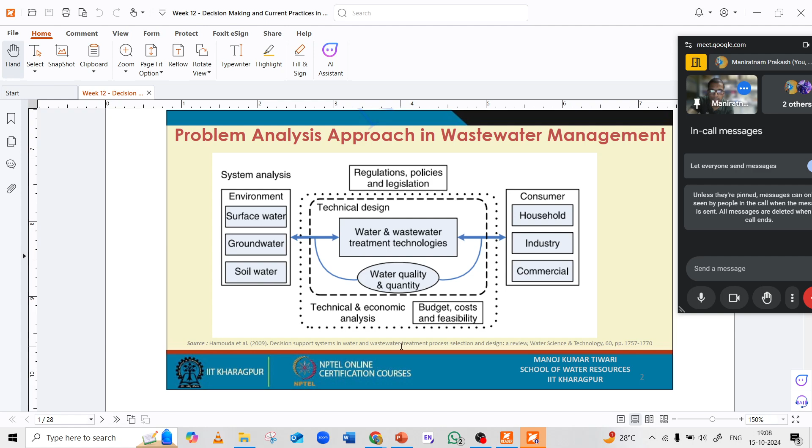Okay, now, challenges and risks. Reclaimed water use is far more complicated than using conventional water - this type of complexity is there. Then there is technical competence - a high degree of technical competence is needed for wastewater recycling than conventional water use. Then there is this, which is a very costly thing.

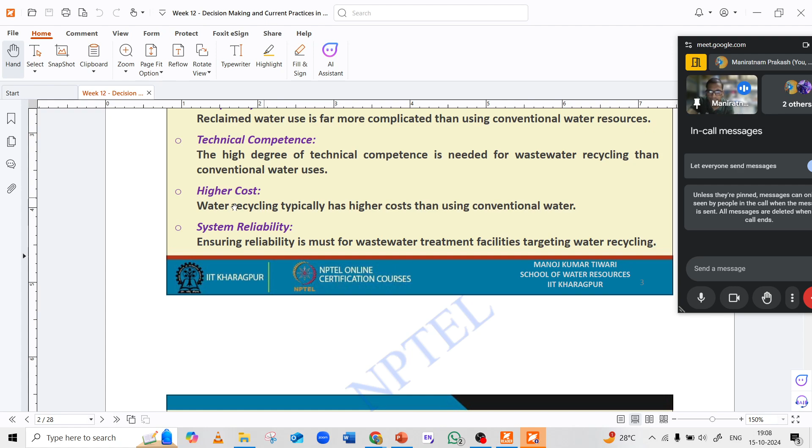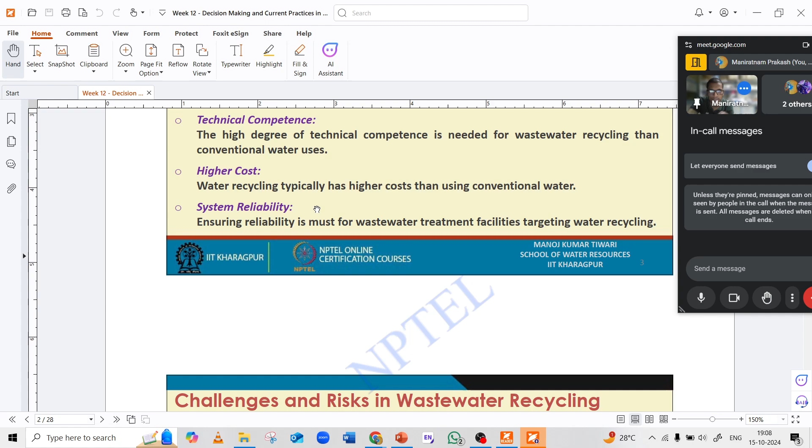We have seen that new technology is required, like membrane and all these things, so it is a bit costly. Then system reliability - ensuring system reliability is a must for wastewater treatment facility targeting. The system design should be such that it can treat the wastewater in a way that it can be recycled.

The main challenge which is generally faced, and people are facing, is social acceptability. There is a people perception that recycled water can pose a significant human health risk. This is just a misconception, or our mindset working in such a way that we think, since this water is coming from wastewater after treatment, it might contain some kind of disease and all these things.

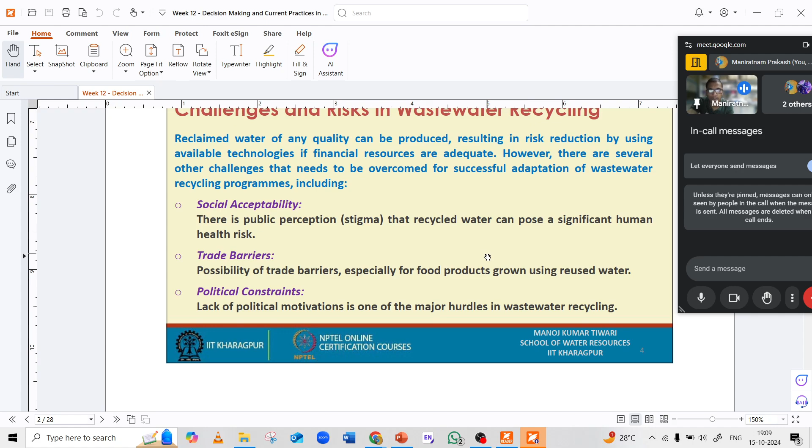So that's not good. We have to change this thing, and there we'll be talking about a strategy also, like how this can be changed. Trade barriers: possibility of trade barriers for food products. This is also a thing. Political constraint: lack of political motivation is one of the major hurdles in wastewater recycling.

So see, in a country like India, we are not focusing on this wastewater treatment. There is some degree of treatment and we are discharging into the river, and we are fully reliant on our groundwater and all this, because there is no, like, how to explain this thing, better not explain.

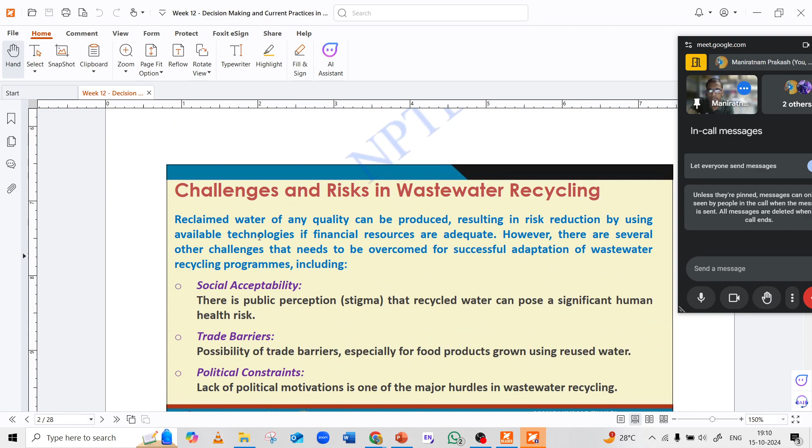Then research trends. There are many ongoing trends; we will be looking into details. First, research is going on in water reclamation and reuse. Intensive research focuses on reusing treated wastewater, even for drinking. We are investing a lot in wastewater treatment so that we are not reliant on our groundwater that is really fresh.

We don't want to disturb our nature, because we have seen people in many parts of the world. You can see the story in India also, that during summer there is drought and people are not getting water. So one way is to reuse the wastewater after treatment. For that there is a lot of ongoing research.

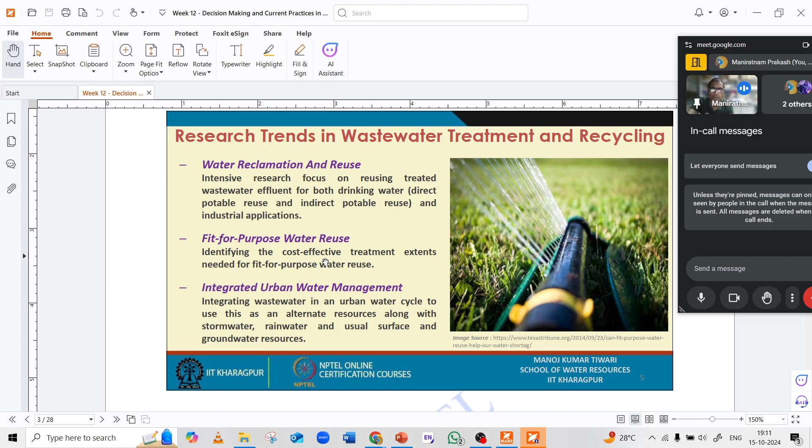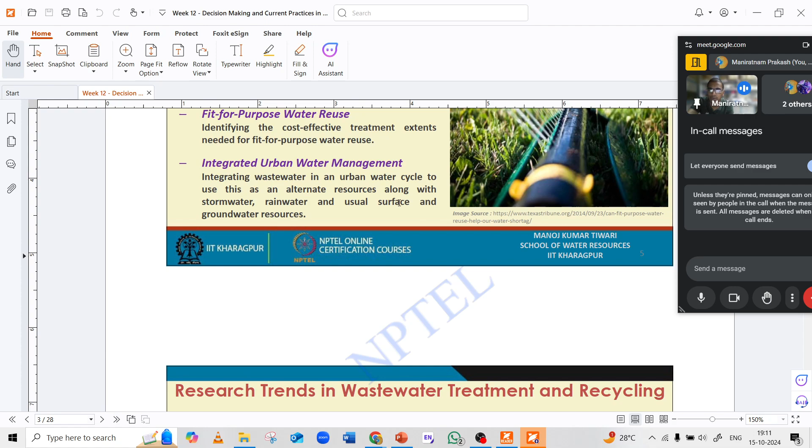Fit for purpose water reuse: identifying the cost effective treatment extent needed for fit for purpose water reuse. This is self explanatory. Integrating wastewater into the urban water cycle, using this alternative source along with storm water and all these things. So these are all ongoing research trends.

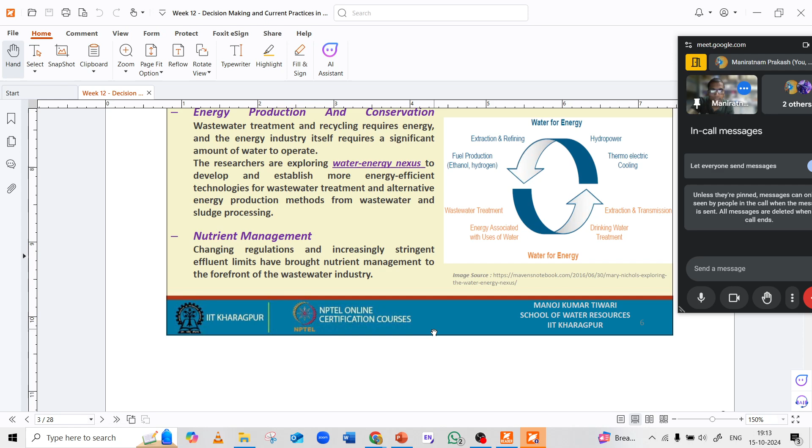They are using hydropower or thermoelectric cooling, extraction and all these things. So there is ongoing research to optimize energy production and consumption, so that wastewater can be treated in an efficient way, there is no investment of fresh water, and energy production is optimum.

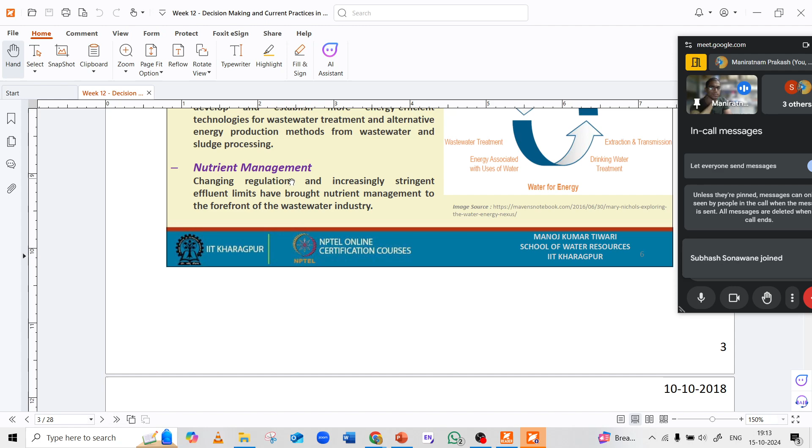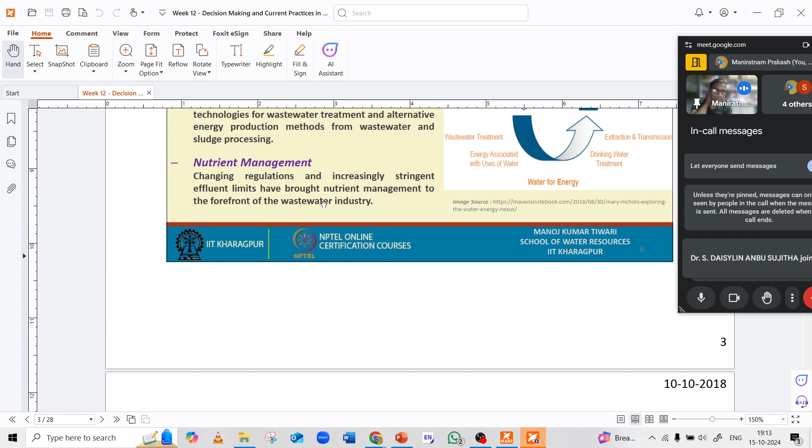Nutrient management: changing regulations and increasingly stringent effluent limits. So again, what do I say, what is the purpose of our treated water? It all depends upon those things only. Oh, sorry.

For those who have joined now, I'm going through some of the challenges and some of the ongoing research in the world regarding wastewater treatment. If you have any kind of doubt, you can ask. I will be going one by one.

Another is residual and biosolid management. We know that when wastewater is treated, a huge amount of sludge is produced, because our wastewater is mostly organic in nature. There are a lot of researchers working on this; I can name IIT Kanpur and IIT Kharagpur. Many professors are working on biosolids and all these things.

They are trying to utilize the sludge being produced from wastewater treatment in something useful. We know that in the conventional method, they treat it anaerobically and produce methane.

But we have also looked at that they have some limitations and all these things. So for more advanced research, you can just search on Google Scholar: industrial wastewater treatment modeling, design, operation of industrial wastewater treatment.

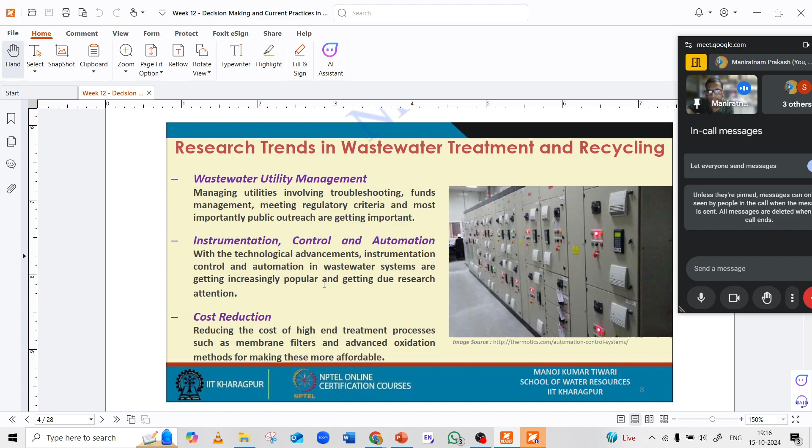So it's really challenging, and research is going on on that also, like how to treat that chromium. Innovative technology ideas, again the same thing. Water and wastewater utility management, instrumentation control. So cost reduction: we know that in the conventional method a huge cost is required for building any equipment and all these things.

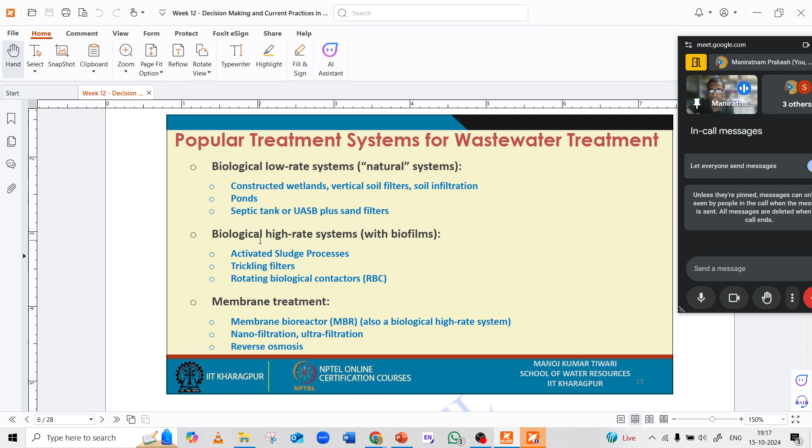Complexity of wastewater management: wastewater treatment systems are complex and dynamic in nature. I will just be going through some of the popular wastewater treatment systems: biological low-rate systems, natural systems. We have seen these things: constructed wetlands, vertical soil filters. So these are some of the popular treatment methods. Then membranes, but we know that these are also costly and not economical for people in an economical society.

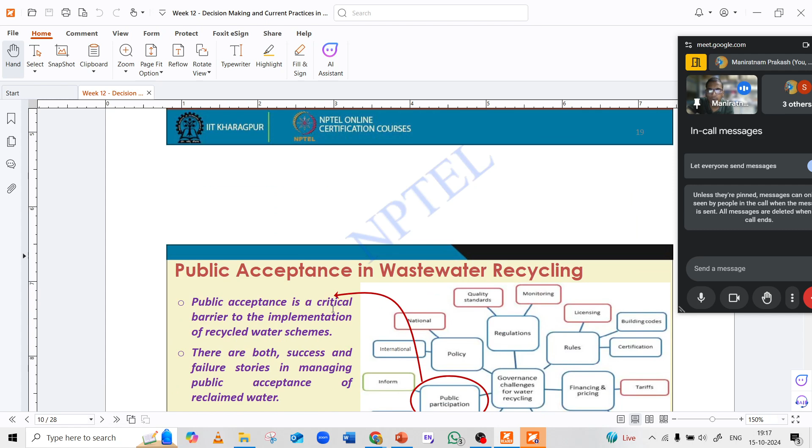So the PDF of this slide has already been shared with you. So I was just giving a small idea of what's in this, what kind of research is generally going on, and then there is this question: is wastewater a technical challenge and all these things. So it depends upon many things.

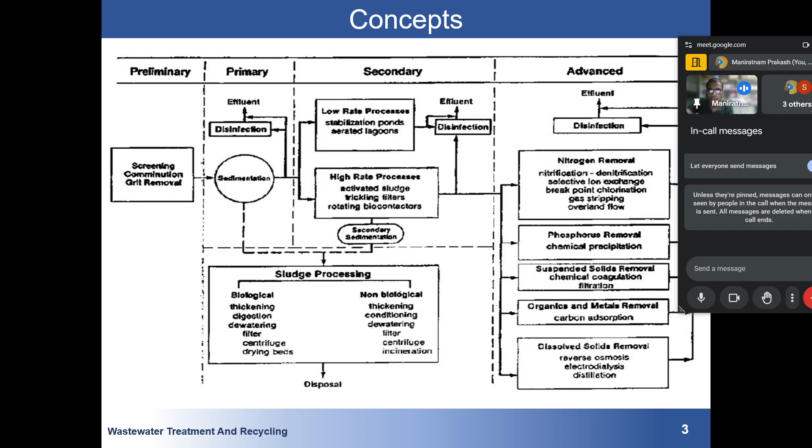So instead of going through these notes, I have tried to make a small summary of all these things. So I will be going through them one by one, and then there will be some questions related to this that you can expect in your exam. So this is just the simple conventional method. Okay, so coming to the challenges, risks and research trends.

Now the challenge in wastewater is complexity. Recycling water is more complex. See, when we are talking about recycling, we are saying that we want to use it for a particular purpose. In the conventional method, we are mostly dealing with discharge and all these things. We are not treating at that level that it can be reused. Now we are talking about wanting to recycle or reuse.

We know that for drinking water there is a specific limit. For irrigation purposes there is a specific limit. So now the process has become complex. We have to develop such technology that can treat the wastewater to such a level. So this method becomes more complex than the conventional method. In the conventional method, water simply comes to different units: first a screening chamber, then grit chamber, then PST, then SST, and all this.

But for a particular purpose, we have to develop a particular process. We have to remove all the unwanted things in wastewater. Obviously, when we are developing technology for advanced treatment, there is some cost investment, so that's how the whole system becomes costly.

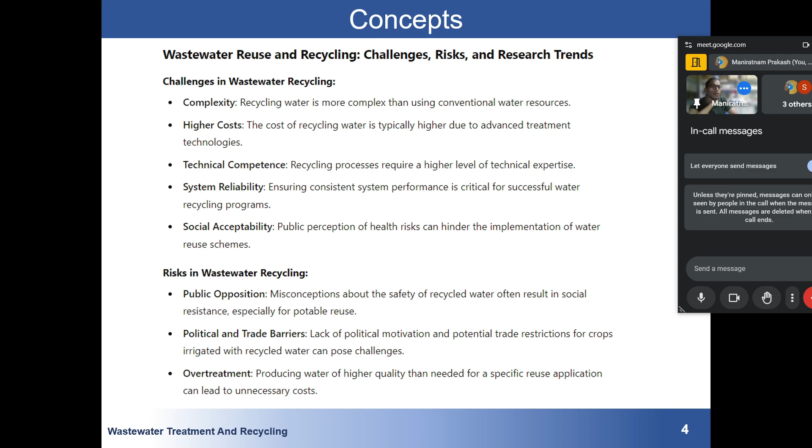Overtreatment: producing water of higher quality than needed for a specific reuse application can lead to unnecessary cost. This is another challenge. Suppose water is being demanded for a particular purpose. We should be investing in such an amount and in such a way that it fulfills our requirement and there is nothing extra going on, because that will just take extra money and extra investment. Then decision making.

We have talked about the technical challenges: advanced treatments are expensive and complex to implement. Nowadays there is the concept of reverse osmosis, membrane filtration, UV, but these are very complex. At the rate at which we are producing wastewater, if we want to treat it by these advanced processes, there should be money. Without that, the whole system will fail, because there is regular maintenance, there is expertise.

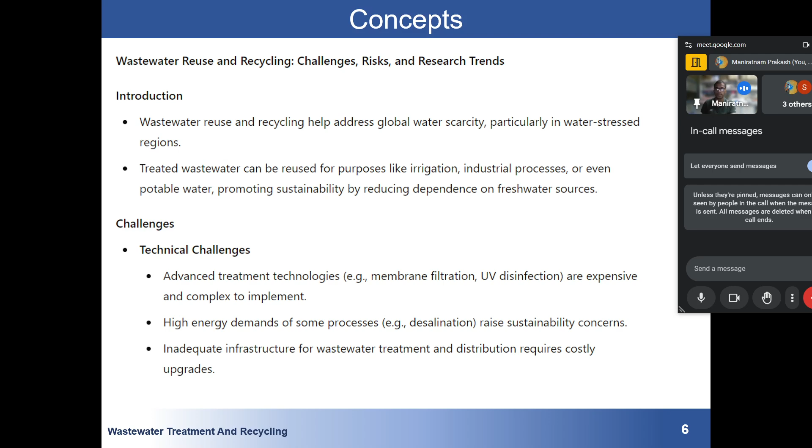Suppose you are hiring some well educated person to run it, there should be a proper salary, because they won't work on a lower salary. So it becomes complex. Okay, high energy demand and infrastructure, where wastewater treatment and distribution is quite costly. Then there is this yuck factor.

The yuck factor: we don't want to accept those things. Suppose some food or water is being given to us, and you have a perception that it was not prepared in a good way, then there will be this yuck factor, that I don't want to use that. It created resistance to the use of recycled water for drinking despite proven safety.

So this is a big challenge. It is seen that in spite of saying that this wastewater which is being given to you is free from any contaminant and it is safe, it is just passing all the drinking water limits, still people somehow tend not to use that treated wastewater. Okay, lack of this thing I have already said.

Then the question is, what are those risks that we are talking about? The first is health risk. Pathogens may persist in treated water, posing risks if reused for potable water without proper safeguards. So this is another kind of risk, health risk.

Chemical contaminants. It's giving you the idea that if you are treating wastewater, you should keep in mind that it should be free from any pathogen, it should be free from any heavy metals, because if those are in water, and you are saying that it is safe and people start to consume, then it will harm people, and it won't be good. Environmental risks.

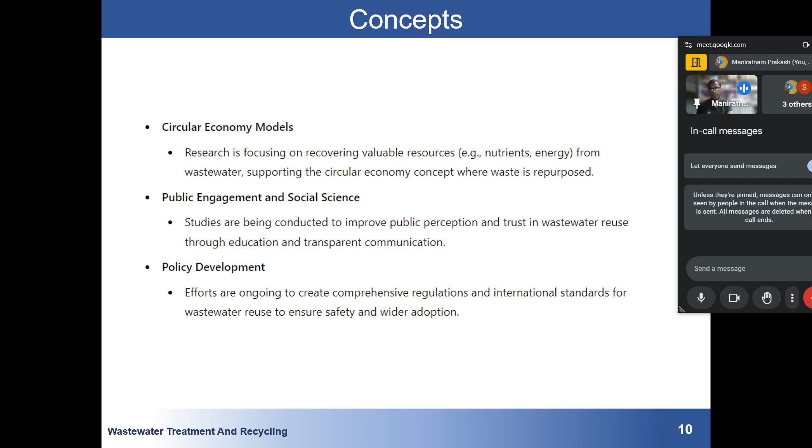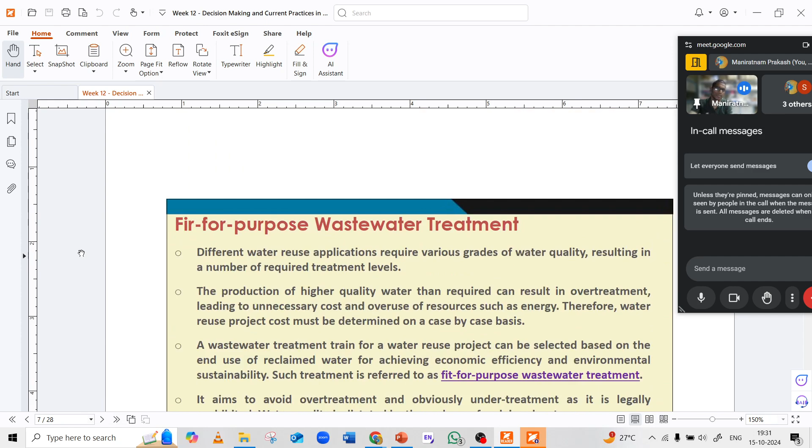This thing we have already talked about, and if you want to look into more detail, I suggest you go to the PDF which has been shared with you. There you will see many things. We were discussing the different research, and if you don't want to go into this slide, you can just search on Google Scholar for wastewater, advanced wastewater treatment, and you will get many ideas.

Then the second topic was decision making in wastewater reuse. Effective decision making in wastewater reuse and recycling involves balancing technical, environmental, and socio-economic factors to ensure a sustainable and safe implementation. So this is most important.

There should be some decision. In a normal sense, what is the final aim of our treated wastewater? Based on that we'll be taking some decision. Suppose we are treating wastewater to discharge in a river, there should be some treatment requirement, and we will be taking decisions based on those things.

Okay, now suppose we are recycling wastewater for drinking purposes; in that case we have to look into some treatment methods and all these things. Now, there are several decisions to make in wastewater, so I will go through them one by one.

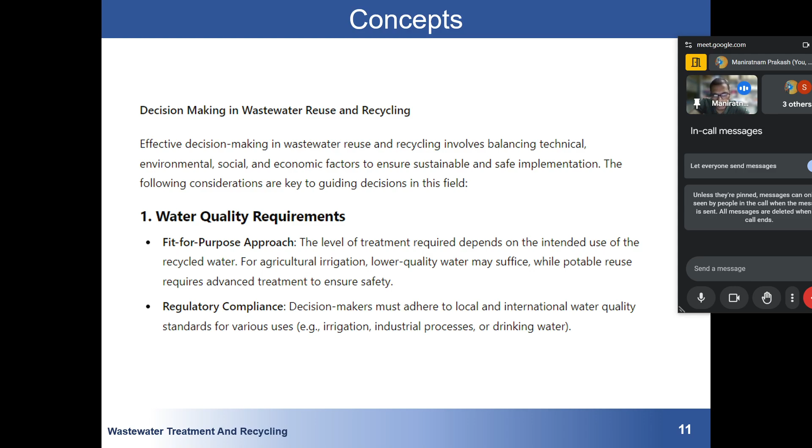On the other hand, if you are going for irrigation, then there are some limits by CPCB, the pollution control board, ZLD, and all these things. ZLD, I don't recall; only CPCB, the pollution control board. So it should meet the criteria given by those policy makers.

Then there is the treatment technology. I will read out technology selection: decision makers need to choose appropriate treatment technology based on the specific contaminants present in wastewater. As I have said, if high pathogens are there, the technology should be able to kill all the pathogens.

Suppose some heavy metals are there, say chromium, arsenic, or fluoride; then the technology to be implemented should be chosen with the aim that after treatment those contaminants are removed.

It should be energy efficient. I have already said that if advanced treatment is there, external energy will be required, and for that we have to spend. Then there is cost consideration: capital and operational cost. Initial capital investment in treatment plants and ongoing maintenance must be evaluated.

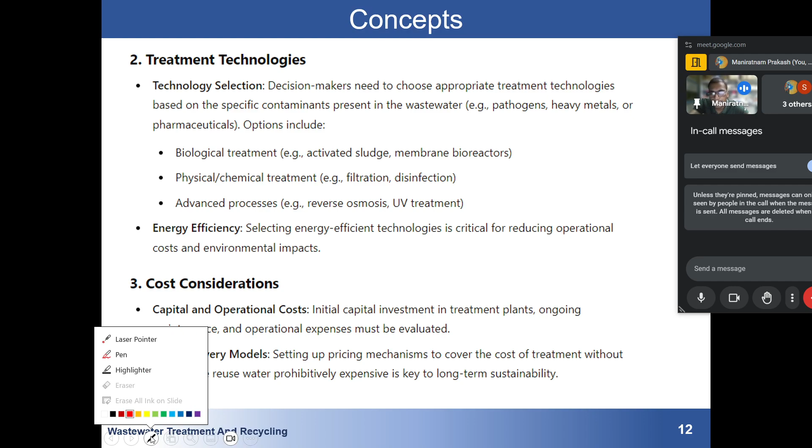Cost recovery models. One of the main challenges with cost is that there will be an initial investment and regular maintenance cost. Now suppose in an area this is our wastewater, there is a canal carrying water, and there are fields here and here. Obviously, laying out this canal involves some investment.

The main challenge is that with time there is regular maintenance. In India and some places it has been seen that whatever they are spending, they are not getting back. There should be some method to recover the cost investment. In short, if they are using this treated wastewater, then they should pay something.

But the question is whether whatever they are discharging is suitable for my river and my soil. So a lot of questions and discussion can go on, but I'm just saying that this kind of decision should be taken.

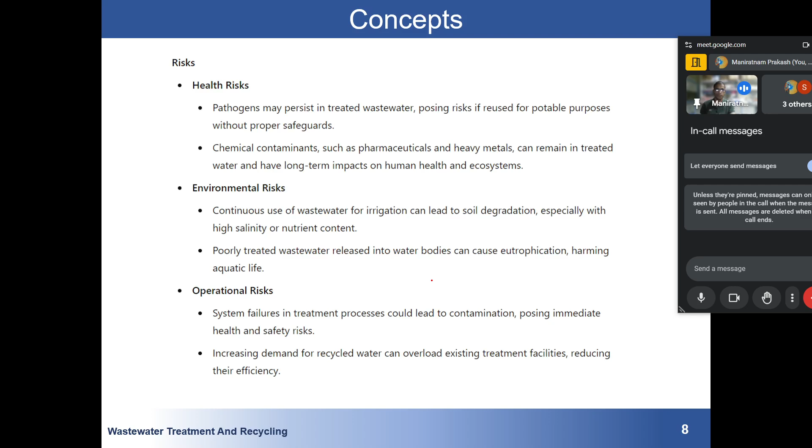Anyone have any kind of question? I'm not.

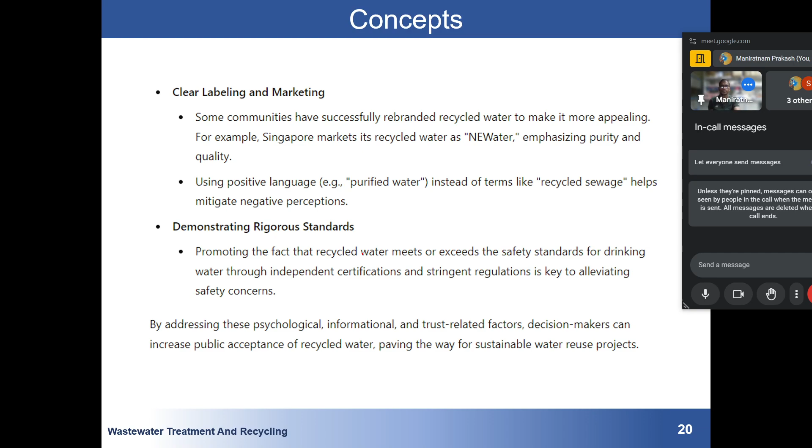So, global practices - what are people using with this wastewater? First is agricultural irrigation.

We have already seen that recycled water is frequently used for agricultural irrigation in water-scarce regions, as it provides a reliable and drought-resistant water source.

Any doubt? A student asks whether agricultural water is free from pathogens. The instructor confirms: agricultural water, yes, it should be free from pathogens.

You can write in the chat box also if you're not audible. Obviously it should be treated to be free from pathogens. For agricultural use, it should be free from pathogens.

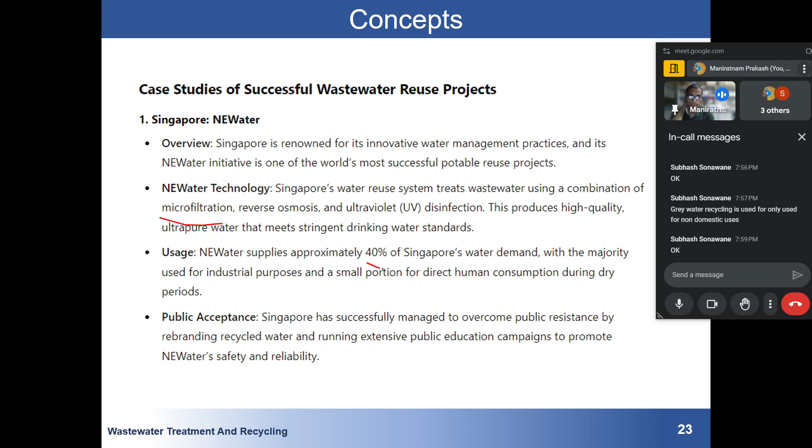Okay, usage: NEWater supplies approximately 40% of Singapore's water demand, with the majority used for industrial purposes, and a small portion directly for human consumption during dry periods. Remember, during dry periods they are treating their wastewater in such a way that 40% of their demand is fulfilled by the treatment of wastewater.

Okay, public acceptance. Singapore has successfully managed to overcome public resistance by rebranding recycled water and running extensive public education campaigns to promote NEWater safety. So, see, this is the most important. The public should accept it. So for that, they have invested a lot. The government was educating the people. They were advertising and all this thing. Okay, now.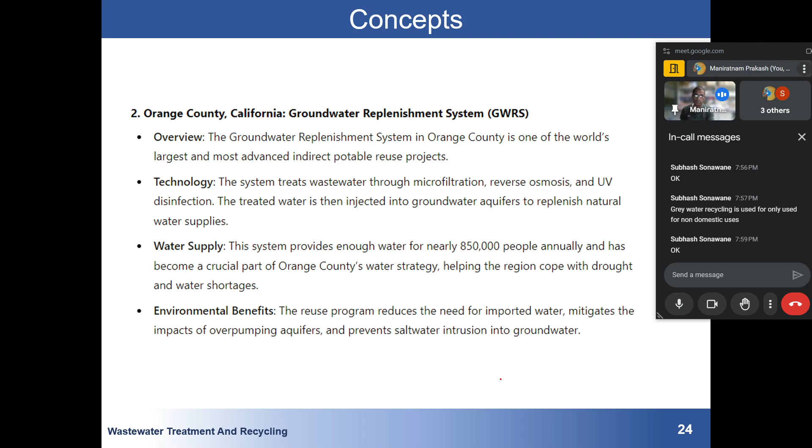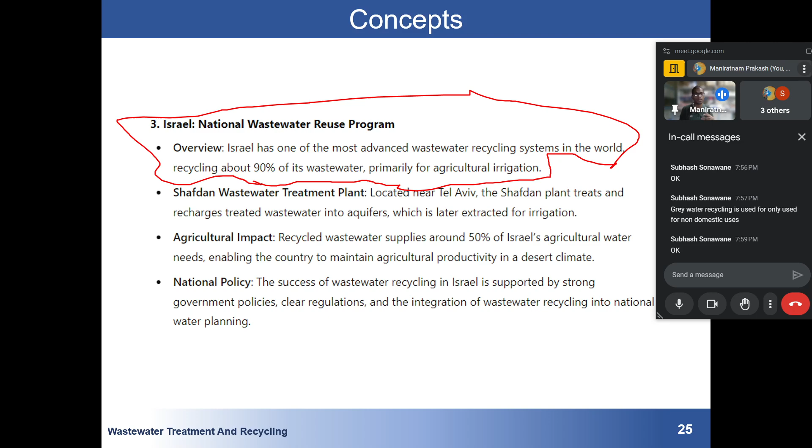If you visit any village, you will see they have built a borewell with a pump, and during the watering season, I don't know the specific name, they will be pumping water for hours to supply the field. So that is not good. We are just destroying our storage. Okay.

So this wastewater treatment plant is located near Tel Aviv, and recharges treated wastewater into the aquifer, which is later extracted for irrigation purposes. Okay, now see, the most important role there is the Technion University. Technion University is in this area. So they are helping and educating the people and all these things. So that's why people are also accepting it, you can understand.

Agricultural impact: recycled wastewater supplies 50% of the country's agricultural water needs, maintaining agricultural productivity in a desert climate. The success is supported by strong government and clear regulation of wastewater recycling. So again there are cases of Namibia, then Spain, same thing. They are using some kind of advanced treatment.

What is the benefit of groundwater recharging? What is the benefit of groundwater recharge for borewell pumps?

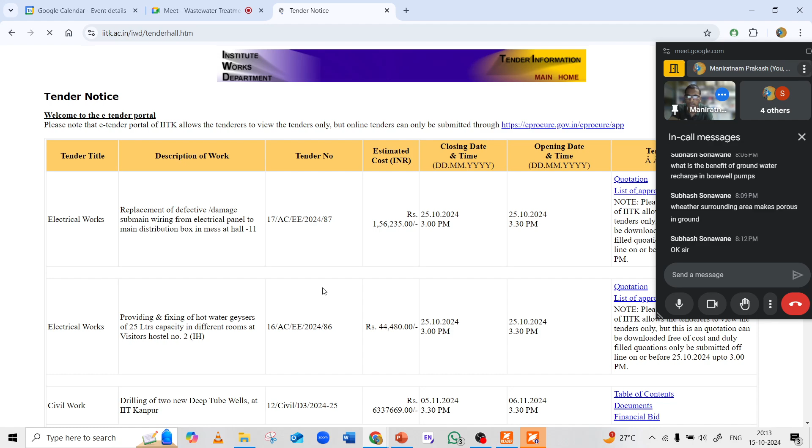I don't know why I'm getting this. Okay, right now I don't have those.

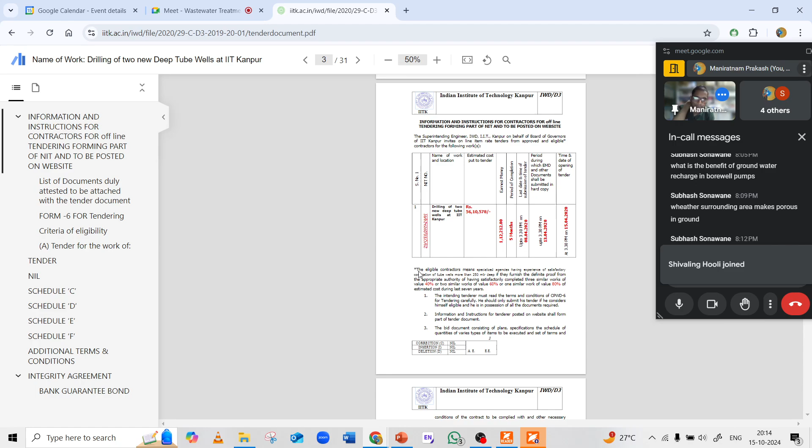So right, sorry, I am not getting it, but this is the main concept: once it is not porous, then we have to make another arrangement for recharge and all these things. I will try to draw a rough diagram of how that thing works. So there is one football ground here in IIT Kanpur. Once there is rain, all the water will be accumulating. Beside that football ground, there is this kind of a well.

So what will happen is that it will first fill the well, and at the top there is one pipe system, then it will pass through one filter unit that contains some kind of gravels and all these things. Once water is getting passed, if there is sediment, all the sediment will be getting collected in this filter unit, and from the filter unit it will just go to this deep well.

Okay, now it will go to the deep well, and finally it will recharge our aquifer. So this is overall, I think you will be getting the idea how this thing works, but this is how recharge will look like. So

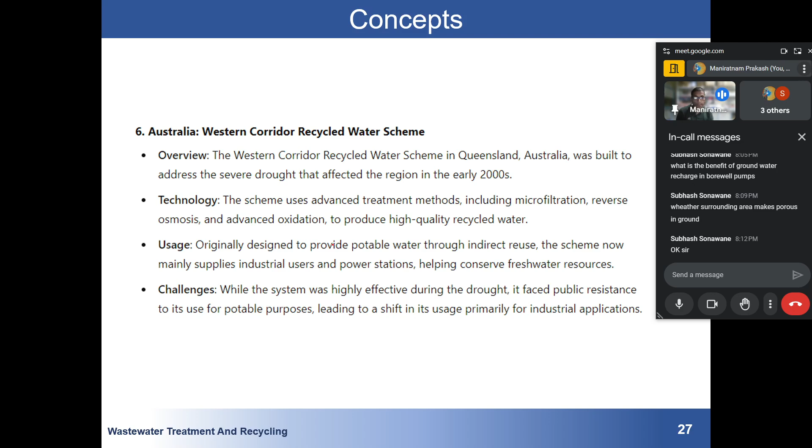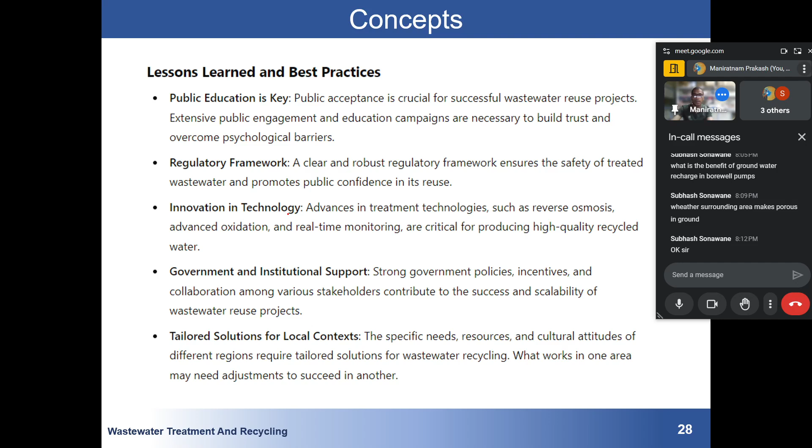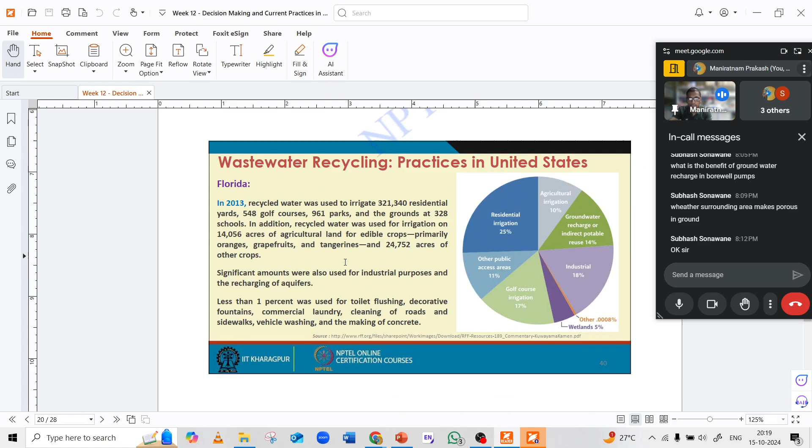Okay, now, for India, I think there is one story from India also which I have not discussed. See, this is a story of Singapore. This is a story of Orange County. Then we have the Florida story also. Israel also. See, Israel, Japan, Australia, UK, Europe.

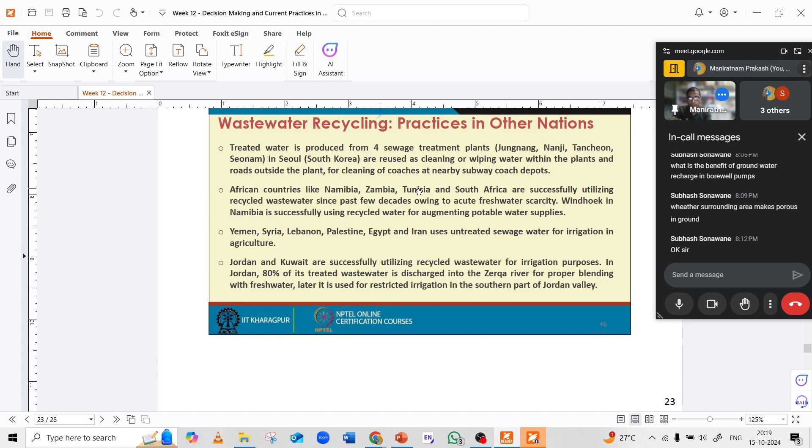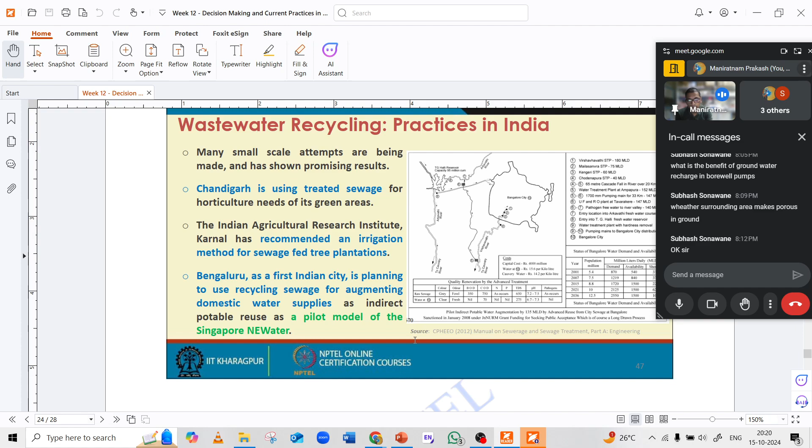In India, many smaller scale wastewater recycling efforts are being made and have shown promising results. Chandigarh is using treated sewage water for horticulture needs for green areas. Indian Agricultural Research Institute, Karnal, has recommended an irrigation method for sewage-fed tree plantation. Bangalore is the first Indian city planning to use recycled sewage for augmenting domestic water supply as indirect potable reuse, on the pilot model of Singapore. So Bangalore is trying to copy Singapore.

In metropolitan cities like Delhi, Mumbai, Bangalore, and Chennai, treated grey water is being used for toilet flushing in some of the major high-rise complexes on a pilot scale.

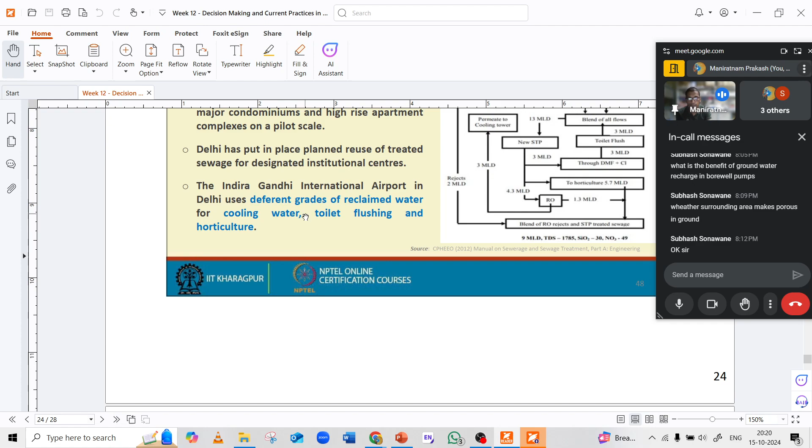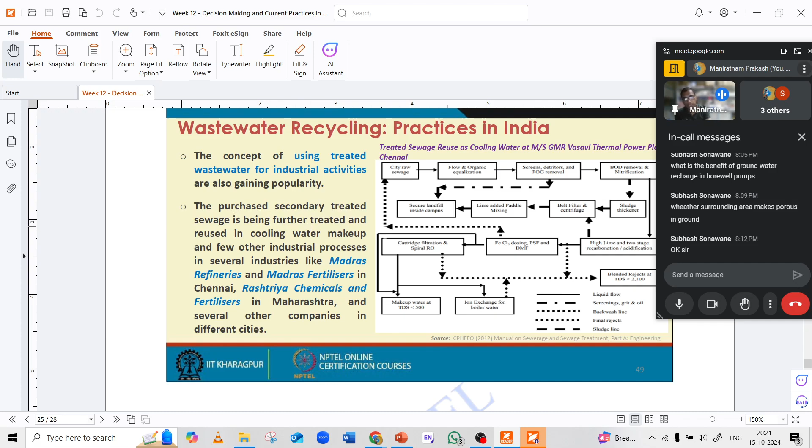Delhi has put in place planned reuse of treated sewage. Indira Gandhi Airport in Delhi uses different grades of reclaimed water for cooling water, toilet flushing, and horticulture. The concept of using treated wastewater for industry is also gaining popularity. The purchased secondary treated sewage is being further treated and used in cooling makeup, and so you can see there are many stories from India also.

Okay, now the government is forcing industry to adopt zero liquid discharge, ensuring complete recycling of industrial wastewater. So they are saying that an industry should not discharge any wastewater. They can just reuse water after some treatment. ZLD has become a mandate for grossly polluting industries like thermal power plants, steel manufacturing, petrochemicals. Pilot projects on groundwater recharge with treated wastewater have also been conducted. Example: Varanasi. Okay, so in India also there are many stories.

Coming to the questions. Now we have the same thing again. There will be some questions, try to answer them. So again, I request everyone to participate. Identify the incorrect statement regarding wastewater recycling trends. Incorrect. You have to answer the incorrect statement.

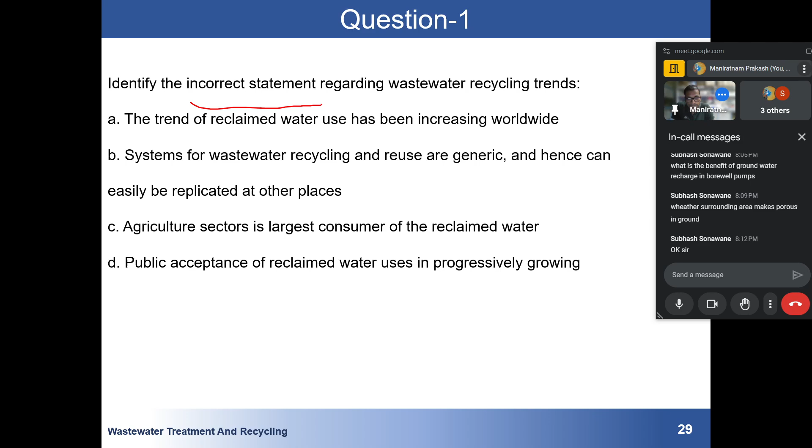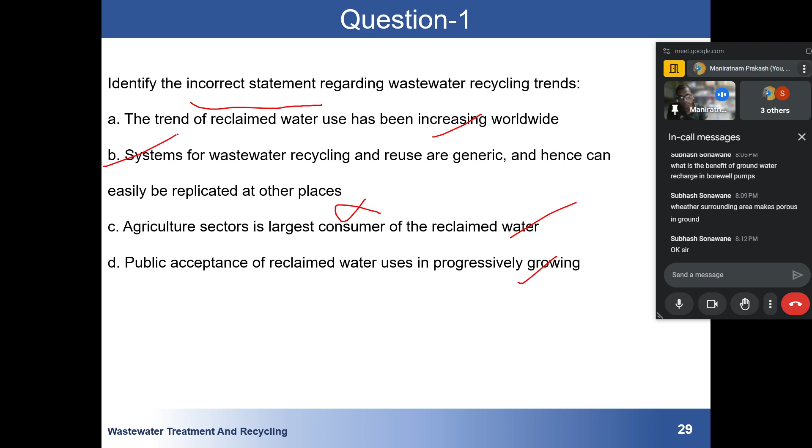Trend of reclaimed water has been increasing worldwide. Yes, that is correct. Systems for wastewater reclamation are generic and hence can be easily replicated at other places. No, this is not correct, because we know that some areas might contain some kinds of contaminants. Agriculture is the largest user. Yes, this is also correct. Public acceptance is progressively growing. Yes. So this is incorrect. So B will be our answer. The correct answer is B.

The trend of reclamation is correct. We have already seen that. So you should be aware of this. Incorrect: wastewater recycling systems are highly site-specific and are influenced by local factors such as geography, climate, technology, social acceptance, regulation and economic conditions. The system must be tailored to meet the unique requirements of each location, and replication is not always straightforward.

Okay. We know that for some area a specific contaminant will be giving problems, so it's not like the same process can be applied to another location. Agriculture, yes, this is correct. Agriculture is indeed the largest consumer of reclaimed water globally, especially in water-scarce regions, where we have seen examples in Queensland, in Israel, in California, Florida, and so on.

Public acceptance of reclaimed water, yes, correct. As people are getting more educated, they are aware that in reality the water is being treated. I have seen one example, I will show you. Here also the government is saying that we are treating wastewater, but the results are really bad. I don't know on what basis they are saying it, but it's really bad.

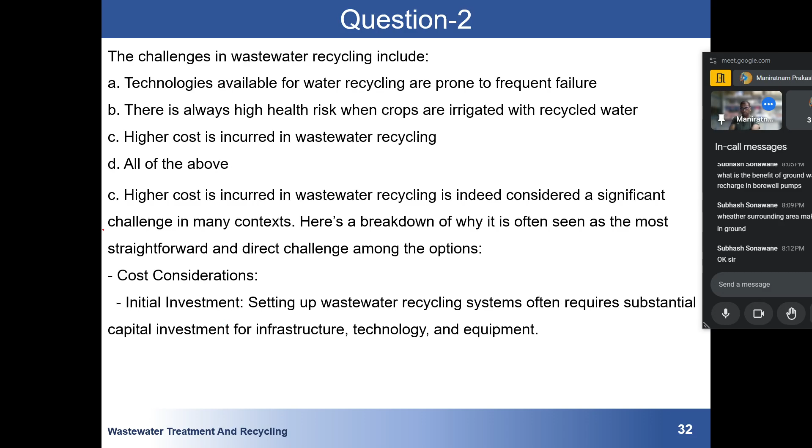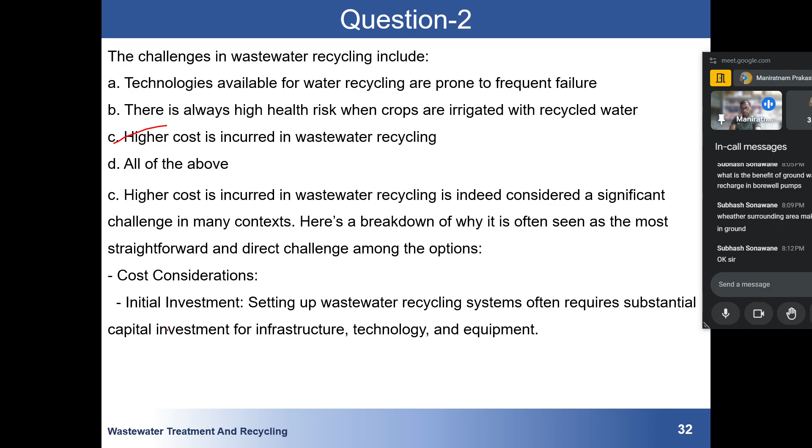C. Its answer is C, cost incurred in wastewater recycling. Higher cost incurred in wastewater recycling is indeed considered a significant challenge in many contexts. Here is a breakdown of why: setting up wastewater recycling often requires substantial investment, so there is a high amount of cost. Operational cost, ongoing costs, and long-term viability. So to manage all these things, there is a huge amount of cost.

If you are answering this question, there are high chances you might think D, all of these, is also correct, but D is not correct. Why? A, technologies for wastewater are prone to frequent failure. While this can happen, many modern technologies have been developed to minimize failures and errors. If we are developing some technology, there will be some failure, but to safeguard against those failures we take precautions. So with advanced technology, we are making sure the technology does not fail.

Okay. So technology does not fail, so it is not a universal challenge. The health risk is also not universally true. With proper management, systems can usually safely recover water, and health risks can be managed effectively. Okay, now see the correct answer.

Try to match the factors affecting public acceptance of recycled wastewater.

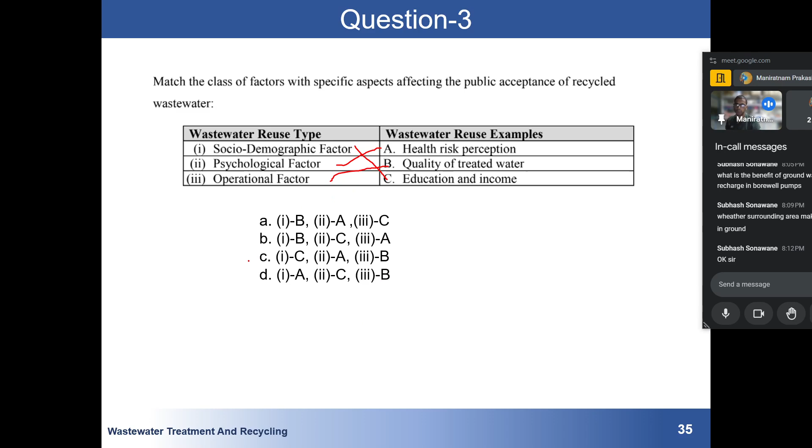So the answer will be CAB. That is C answer. So this was quite simple. CAB, huh? Related to characteristics of population such as education and income, which can influence the acceptance of recycled water, must match C. Okay. Psychological: people's perception and belief, particularly concern about health risks associated with recycled water. So health and risk. And operational involves the performance and quality. The correct answer is C. Okay.

Then question number 4. Decision making on the selection of an optimum treatment sequence for wastewater recycling is becoming a challenge for designers due to this thing we have discussed. A steadily growing number of alternative processes, inferior performance of wastewater treatment units, growing level of socially unacceptable, to what? Okay. So

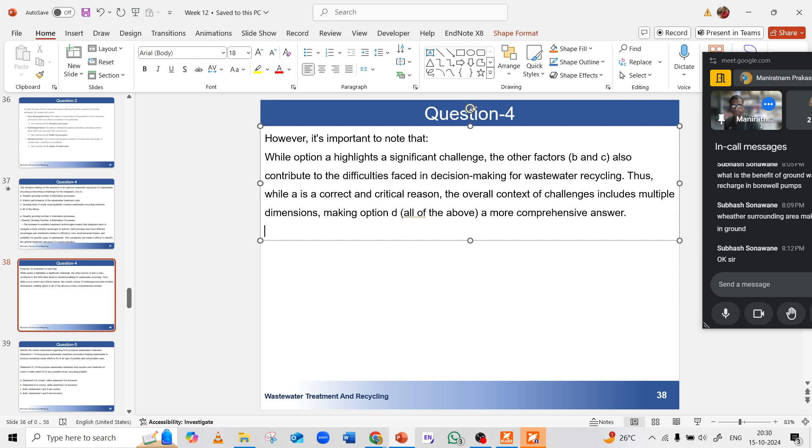the increase in available treatment technology means the designers have to be so, its answer is A. Okay, steady. The increase in available treatment technology means that designers have to navigate a complex financial problem. Each process may have different advantages and drawbacks, ecosystem and all these things we have discussed.

Okay. So decision making on selection of an optimal treatment method for wastewater is becoming a challenge for designers due to, obviously, many alternative methods being there. So now they have to decide where they have to rely and all these things. Okay. While the other options also contributed, A is the correct and critical reason. See here, D can also be an answer, but A is the most challenging thing. Okay.

Question number 5. We have discussed this. Fit for purpose wastewater treatment advocates treating wastewater to produce reclaimed water which is fit for all types of potable and non-potable use. No, this is incorrect. We have seen that we should not be over treating our water. If we are recycling water for non-potable purpose, we cannot use that for potable purpose. We don't want to invest too much.

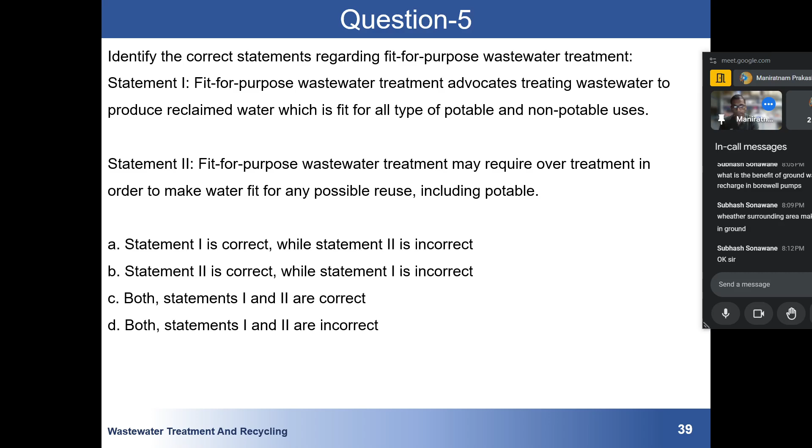Fit for purpose treatment is specifically focused on treating wastewater to meet the specific quality standards required for its intended use rather than treating it for all possible uses. This idea tailors the treatment to actual use. I hope you are understanding it. Second statement: this concept of fit for purpose does not advocate for over treatment. Rather, it emphasizes treating water to the level necessary. Obviously, we don't want to.

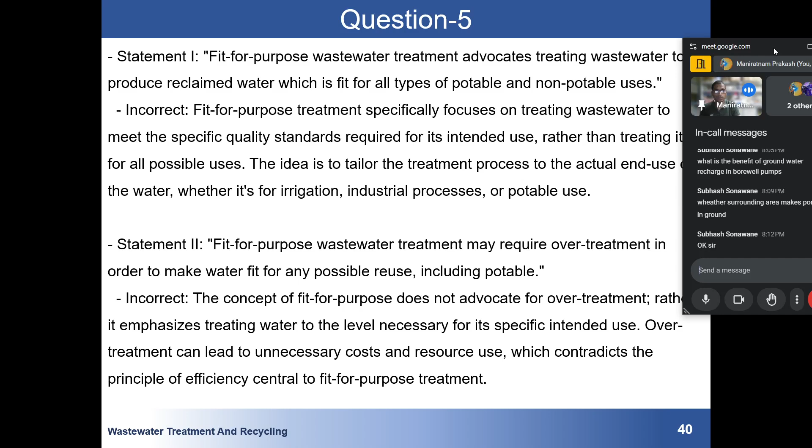That's why during decision making we should be aware of why we are treating that wastewater. Okay. If we know that, then we won't be over treating and all these things. We won't be doing that.

Again, maximum wastewater. We know that about 90%, other countries are also engaged in wastewater recycling, but none like Israel, the country that recycles the maximum amount of wastewater. Israel, okay, quite famous. Okay, this was question number 6.

Usually public acceptance of recycled water is highest for, obviously not for drinking purpose. Bathing also is not done. Fish farming and food crop irrigation. Fish farming is not happening. Watering lawns and all. D will be correct answer.

So obviously, while there is a growing acceptance, it's not okay now. Bathing may be more acceptable than potable usage, but still some concern about direct skin contact. This may be acceptable, but there are still concerns about safety, especially regarding consumption of food grown on the recycled water. This generally enjoys the highest acceptance as it involves minimum health risk and is less controversial, making it a preferable option for many people. So D is the option where people's acceptance is the highest.

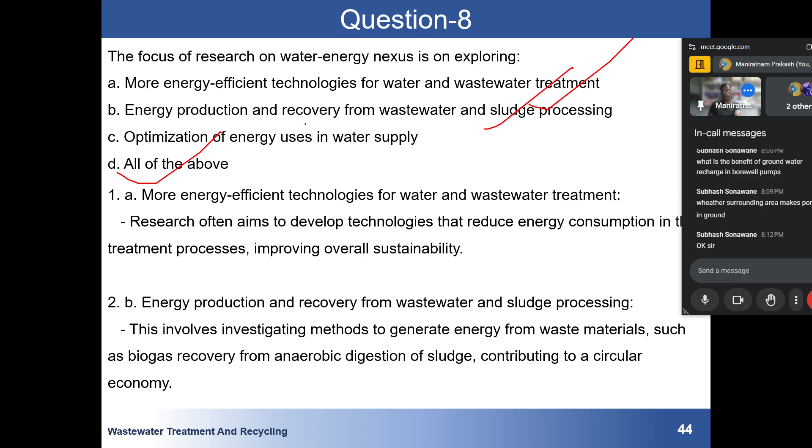Okay, so focus of research on water and energy nexus is on exploring. I think we can see that all of these, they are investing in everything. More energy efficient technology for water and wastewater treatment, energy production and recovery from wastewater and sludge processing. Then optimization of energy usage in water supply. Then we have all of above. Okay. Yes, given that understanding, the interaction between all of these is the answer. Okay, now.

Okay, so the answer will be B. The correct answer is B. Singapore NEWater and Orange County in California, United States. Singapore NEWater is the example of a successful large-scale wastewater recycling program that produces high-quality reclaimed water for various purposes. Similarly, why not the others?

While Toowoomba did discuss recycling, it faced significant public opposition and was not successfully implemented on a large scale. Paris in France is less recognized as a major success story in water. Also, Bangalore has made strides in wastewater, but is not widely recognized as successful compared to global examples. San Diego has implemented some water recycling, but obviously these are not so famous. Okay, but for other cases, it's good.

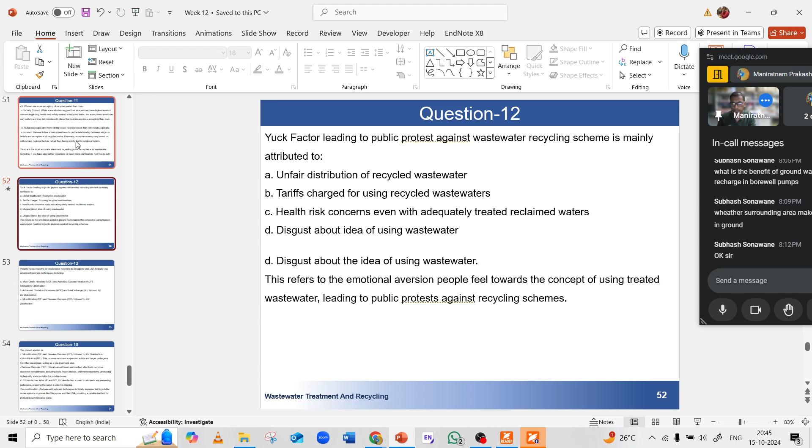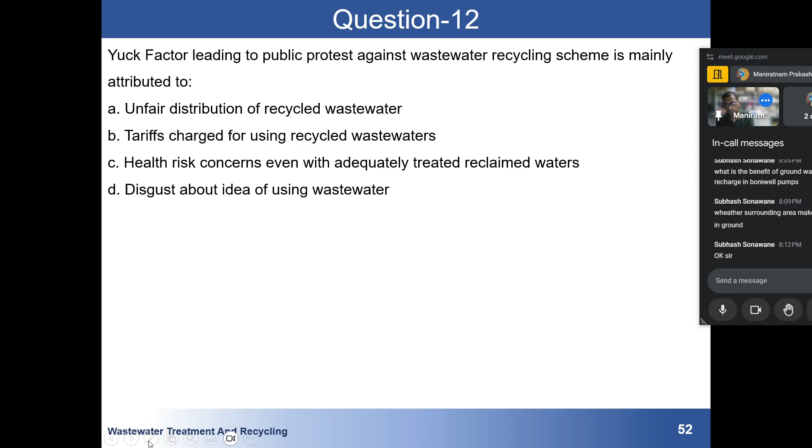Question number 12, yuck factor. We have already discussed this yuck factor - unfair distribution, tariffs charged, and the idea of using wastewater. This was straightforward. It refers to the emotional perception or aversion people feel toward the concept of using treated wastewater, leading to public protest against recycling schemes. Generally, it's seen that they don't want to use recycled water.

Question number 13, potable reuse systems for wastewater recycling in Singapore and USA typically use advanced treatment techniques including. I have shown you this thing before. Both places use advanced technology. What are those advanced technologies?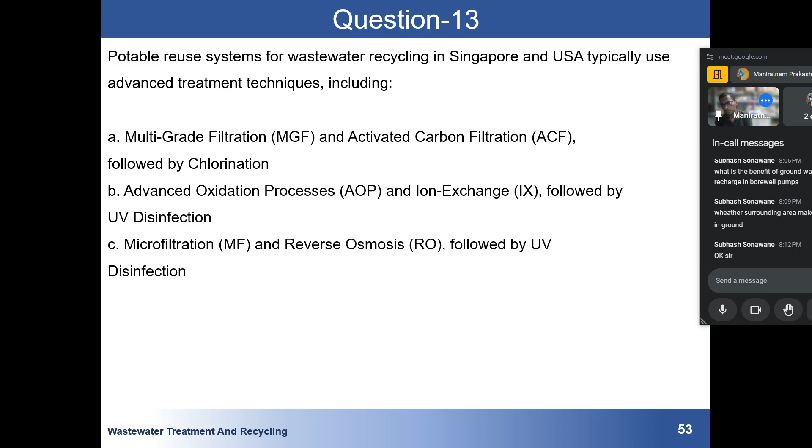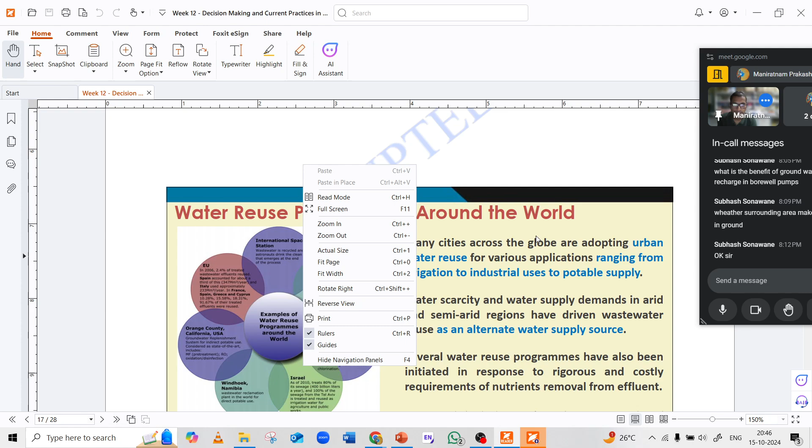If you want, we can go here, around the world - see, this is a success story, this is a failure story. Singapore, see how they use it.

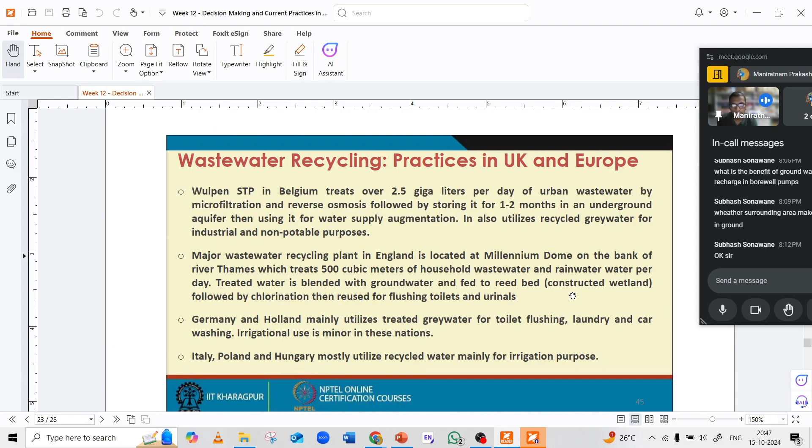You can see reverse osmosis. First microfiltration, then reverse osmosis, then UV. Similarly in Australia, we will see the same - I think the same practice is done there too.

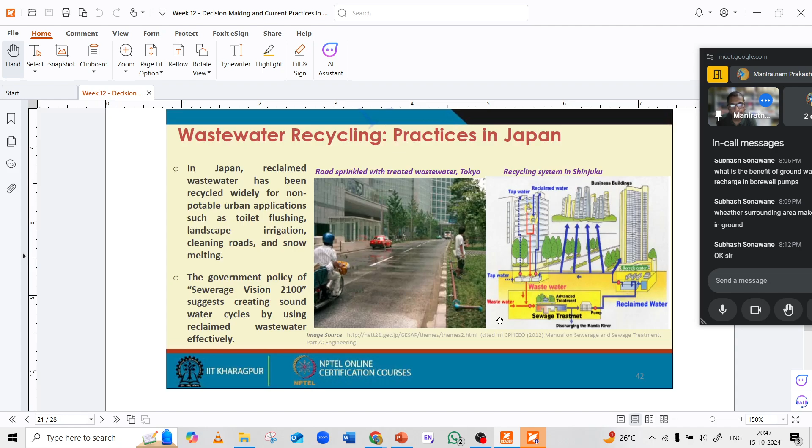So what is our option? See this, option C - microfiltration, reverse osmosis followed by UV. You can see from this picture. Where is the picture - see, microfiltration first. What will happen is the water will go to a water reclamation plant.

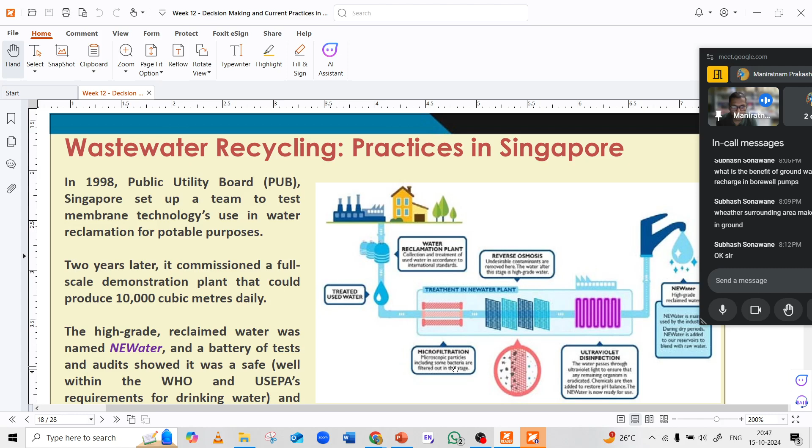Then there will be microfiltration, reverse osmosis, then ultraviolet treatment, and finally we will have NEWater - treated used water. Remember, treated wastewater - used water means treated wastewater.

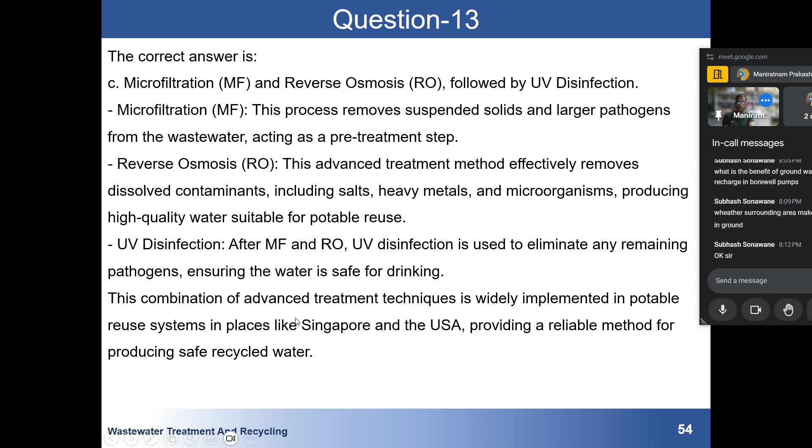So the correct answer is C: microfiltration, reverse osmosis, followed by UV. This process removes suspended solids and larger pathogens from wastewater, acting as a pre-treatment stage. Then reverse osmosis, this advanced treatment method, effectively removes dissolved contaminants. Finally we have UV disinfection, which after MF and RO is used to eliminate any remaining pathogens and ensure the water is safe to drink. This combination of advanced treatment techniques is widely implemented in potable reuse, ensuring the treatment is mandated under...

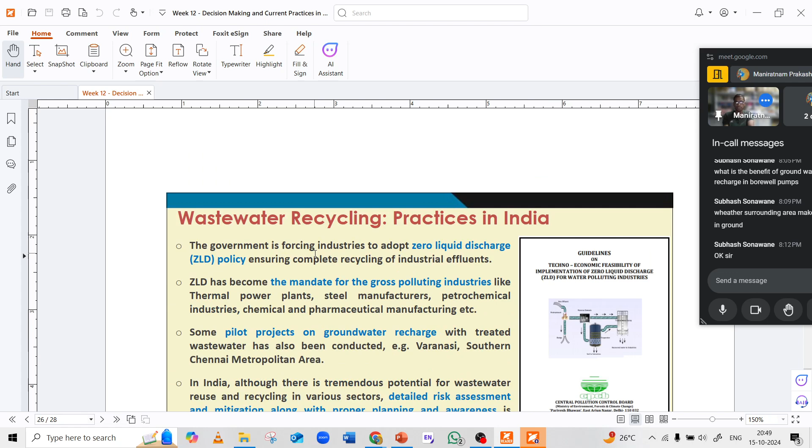I have shown you one report - again for this we can refer to this slide. ZLD - zero discharge, zero liquid discharge. ZLD, zero liquid discharge.

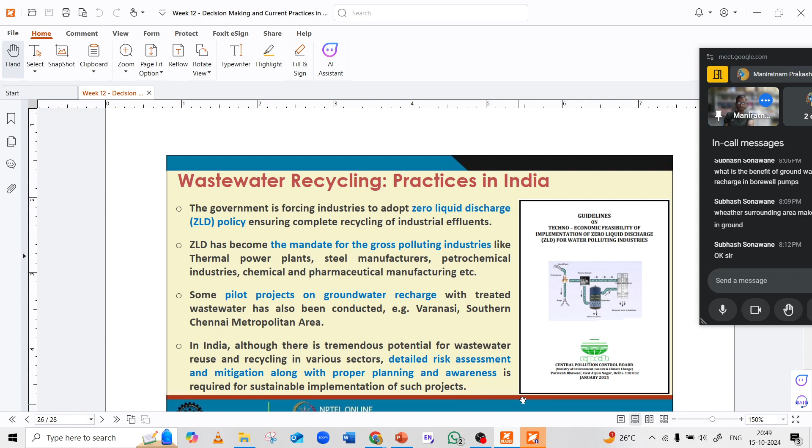So they have their own policies and all these things.

So the correct answer is B - zero liquid discharge. Generally, zero liquid discharge is this environmental policy ensuring that all industrial effluents are treated and no liquid waste is discharged into the environment. Under this, industries are required to recycle and reuse wastewater completely, thereby minimizing environmental pollution and conserving water resources. The other options, while related to water sanitization, do not specifically mandate complete treatment. So the correct answer is B.

Okay, finally our final question of the day, or of the entire session. IUWM considers this - this thing I have not discussed.

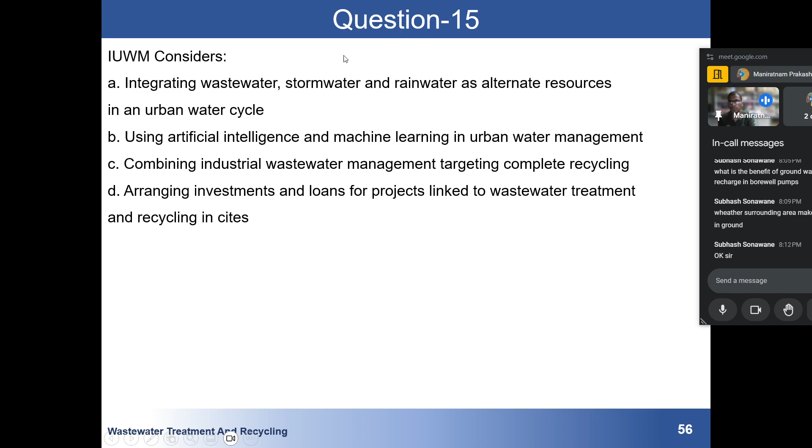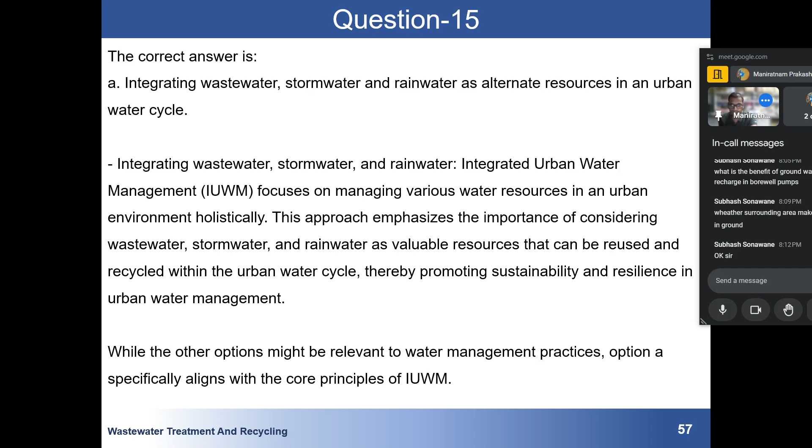So see, integrated water management - I think I have discussed it somewhere. Let's see - IUWM: integrating wastewater, stormwater, and rainwater - integrated urban water management. IUWM stands for integrated urban water management. It focuses on managing various water resources in an urban environment holistically. This approach emphasizes the importance of considering wastewater, stormwater, and rainwater as valuable resources that can be reused and recycled within the urban water cycle, thereby promoting sustainability and resilience in urban water management. So the correct answer was A.